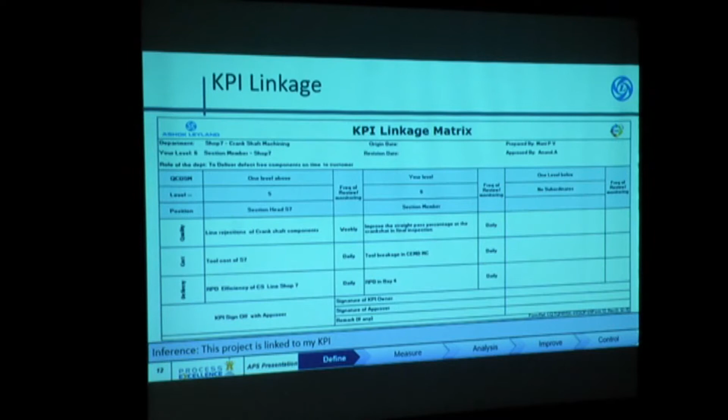So what defects make up the 73% straight pass rate in crankshaft? In Ashok Leyland, everyone's KRA has a KPI, key performance indicator, aligned to top management. We can't set the KPI individually; it should branch from the MD. Every KPI is linked to the management business goal. This is the KPI linkage matrix, showing that we are addressing straight pass improvement in the crankshaft.

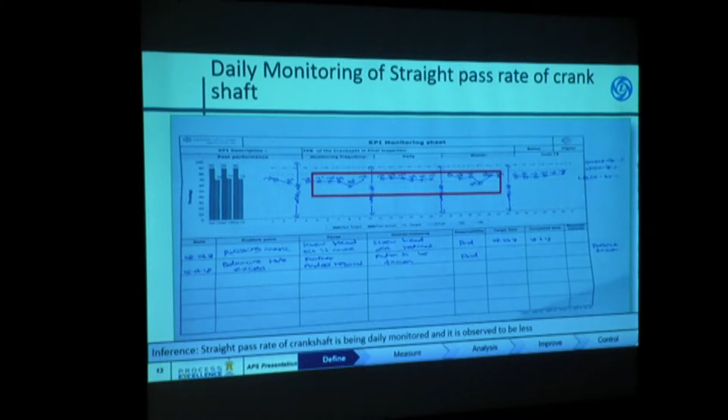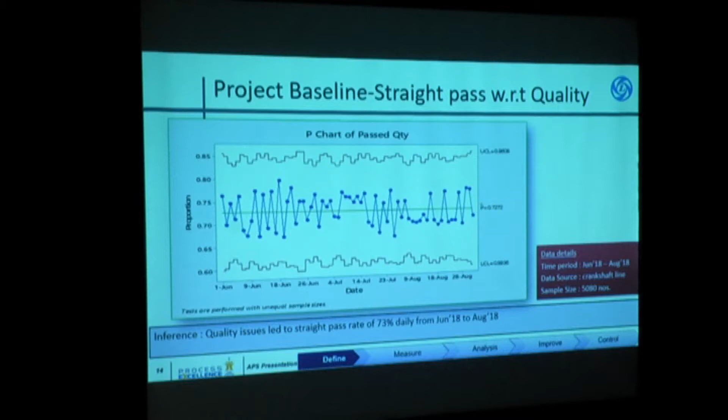This is the KPI monitoring sheet where we monitor our straight pass improvement and the range before the project. This is a P chart. Before the project, we monitored our defects per day and outputs. The P chart shows that the variation is inherent in the process; there are no assignable causes. Based on that, our first pass rate was only 73%.

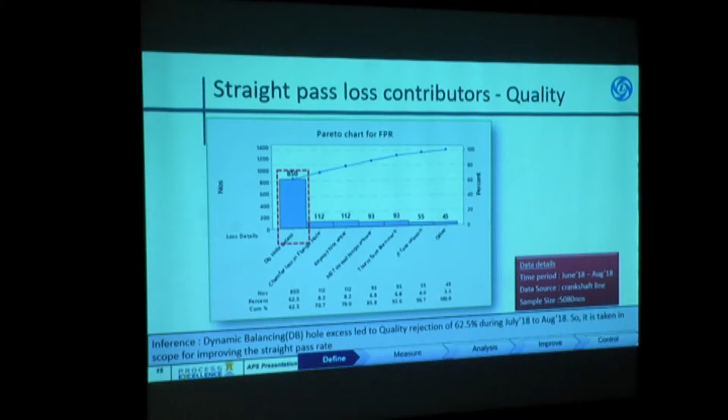This is a Pareto chart. From it, DB hole excess is the major problem affecting our straight pass rate. So first we will see about the crankshaft.

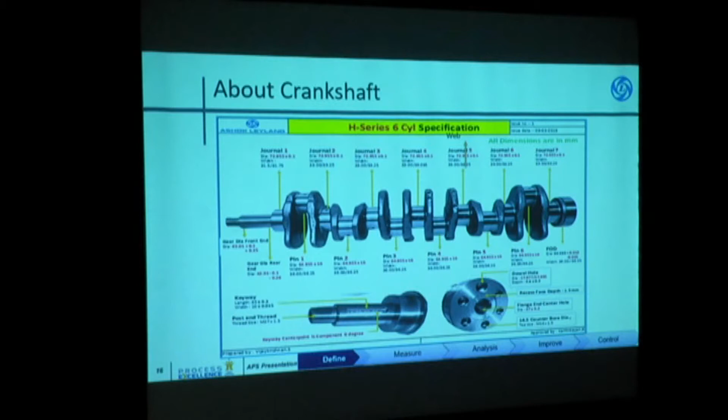Crankshaft specification we have to see: this is for main bearing journals, this is for pin, this is our web. This main bearing journal will mount on the engine. This is a pin for mounting the connecting rod. This is the distance between the main bearing and the pin, that is throw. This angle variation from the dowel hole to the pin is index error. So this is the nomenclature we should know, then only we go to the project.

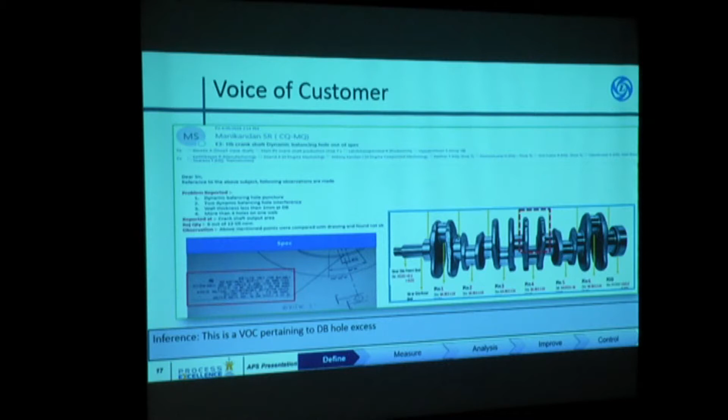So this is our voice of customer. Whatever problem they are facing related to the crankshaft, they will send the mail. We have to take the corrective action. Based on that, we can improve our first pass rate. So this is the first problem: DB hole excess. This is the as-is photo showing that in every web, when we are balancing the crankshaft in the final operation, every web should contain only 4 holes. If it is 5 holes, it will be NC. It will not pass to the assembly.

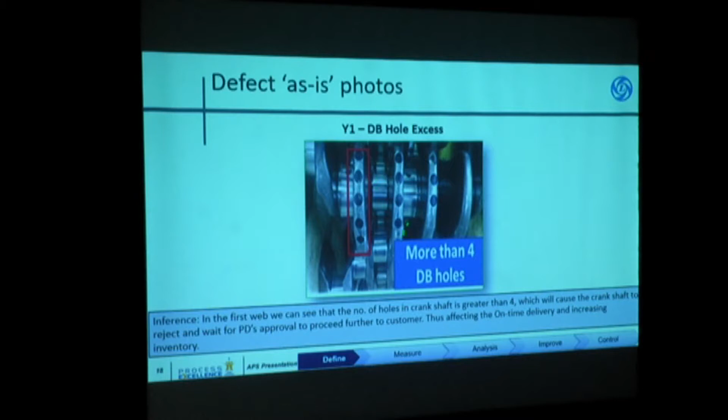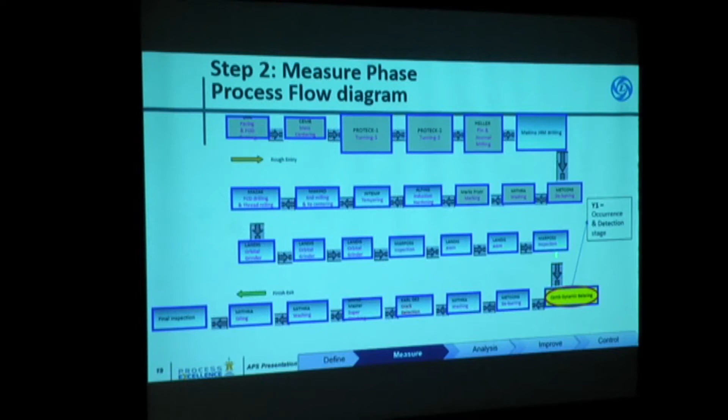So this is our process flow chart. In our process, we are doing the turning operation, then milling operation, then induction hardening operation, and then finally the dynamic balancing operation. This is the process where we make the DB hole, the dynamic balancing hole, in the crankshaft. This will reduce the mass and balance the crankshaft to supply to the assembly. So this is the as-is photo.

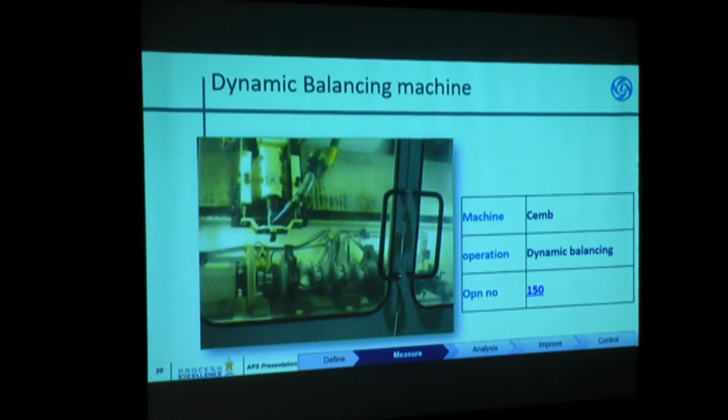First we are going to the in-depth analysis. First, whether the process is operating as per the SOP, we go to the Gemba observation and check the process. In this process, the gantry will load the component and then it will rotate. This is the final grinding operation component. After it rotates, the mass balancing will be checked by the machine, and then the drilling will be done in the web hole. It will remove the mass from the crankshaft, and after balancing it will show that the component is okay, then it will automatically pass. There is no manual intervention, only gantry loading and unloading.

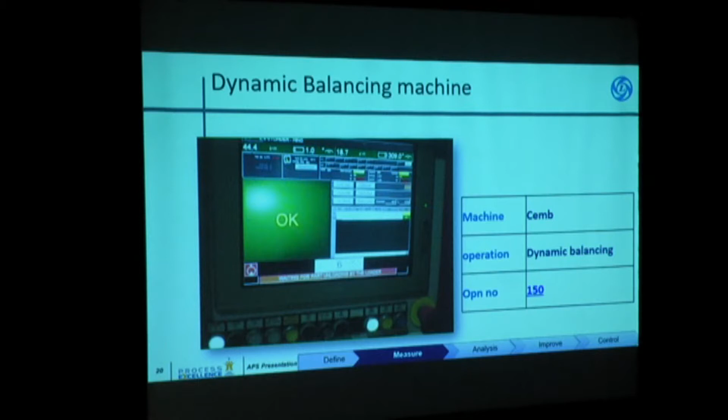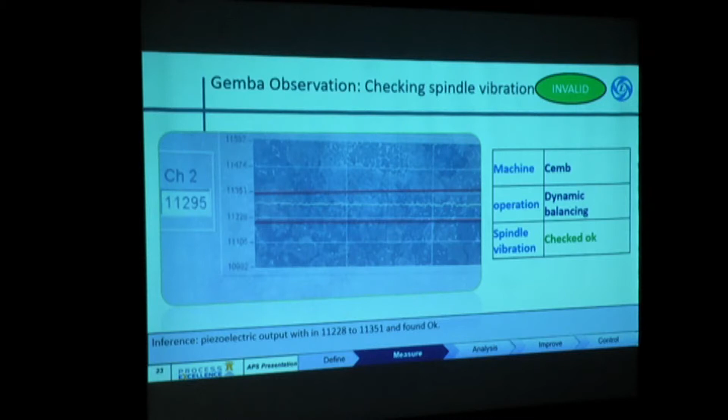So based on that we map the process, whatever key process input variables are associated with this problem, and then the key process output variables. During the Gemba observation, we find out three possible causes of component rejection in the dynamic balancing machine. First one is spindle vibration. We checked the spindle vibration value and found it within the limit only. Second one is driven bracket tightness. Continuously for 10 days we checked the driven bracket tightness. It is also within the limit, 35 Newton meter. So we eliminate this; it is not a cause for component rejection.

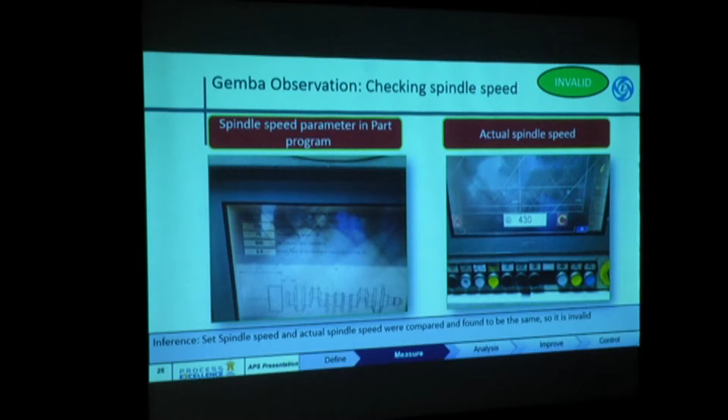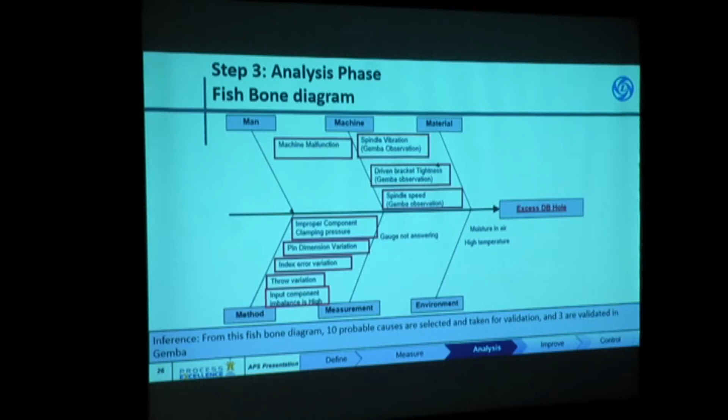The third observation point is spindle speed, set value and actual value. We check the set and actual value for any difference. There is no difference between the set and actual value, so we eliminate the spindle speed also. Then we analyze with the cause and effect diagram. We find out 10 possible causes. Of the 10 possible causes, we already discussed 3 in the Gemba observation. The remaining 7 we are going to discuss.

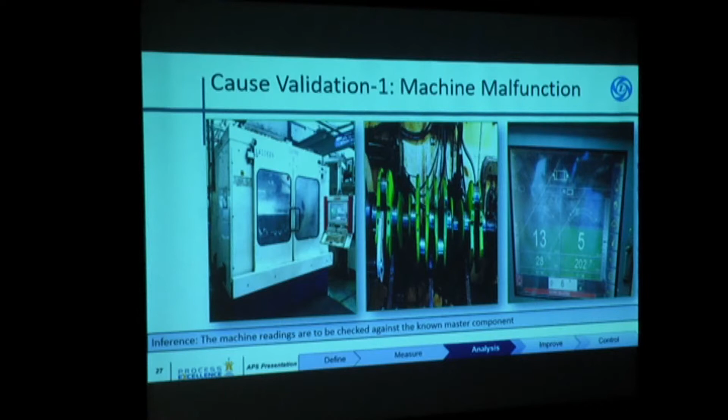First one is machine malfunction. How do we check machine malfunction? Using a master component. This is a master component. Using the master component, we check the imbalance in both plane 1 and plane 2. Plane 1 and plane 2 readings are within spec, and plane 1 and plane 2 angles are within spec. So we eliminate these; they are not causes for the component rejection.

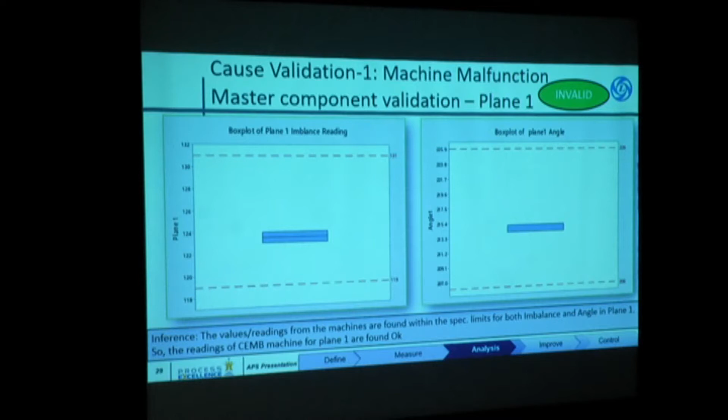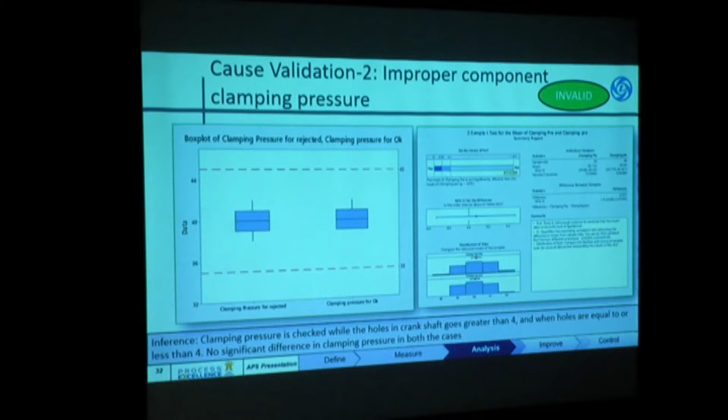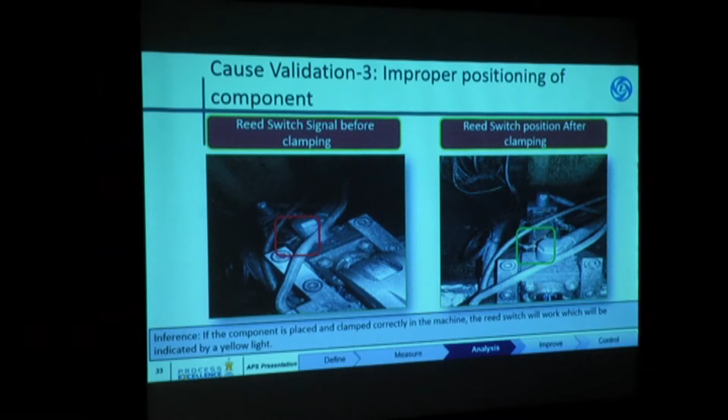Next we go with component clamping pressure. Component clamping pressure is 35 to 45 bar. We continuously checked the sample size and got a p-value of 0.7. So we find out this is not a cause for component rejection. Next we go with component clamping position. For component clamping position we get feedback from the cylinder reed switch. We check the reed switch position with the sample size we have taken. We get a p-value of 0.7. So we find out this is not a cause for the component rejection.

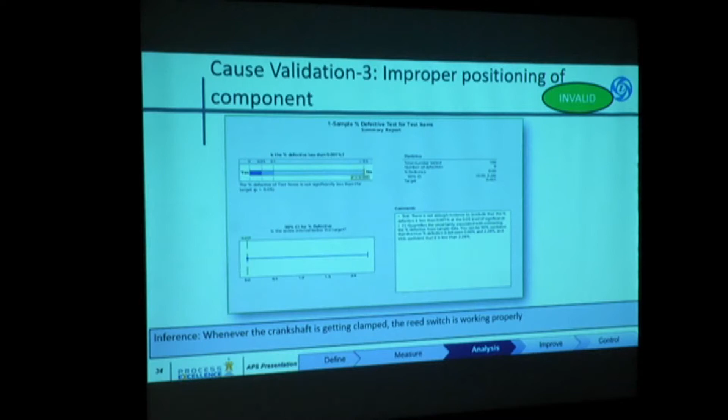In the cause validation we will be verifying whether there is any variation in the pin diameter. Initially we collected 25 data points and tested whether the data follows a normal distribution using the goodness of fit option. We found that the data follows a Weibull distribution rather than normality, since its p value is greater than 0.05.

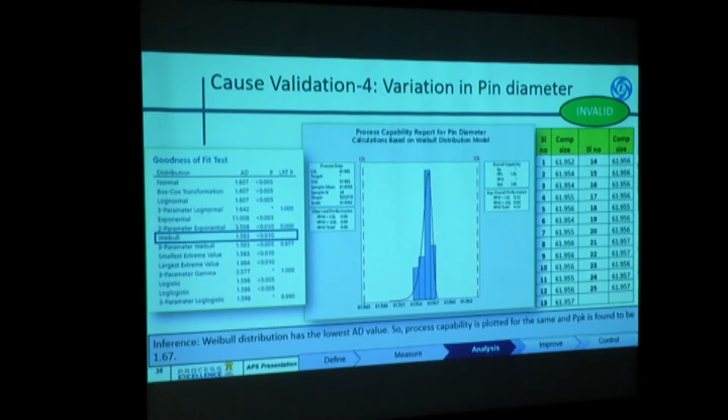So we plotted the process capability for Weibull distribution and found that the Ppk value is 1.67. So the process is capable, meaning there is no variation in the pin diameter. So this is an invalid cause.

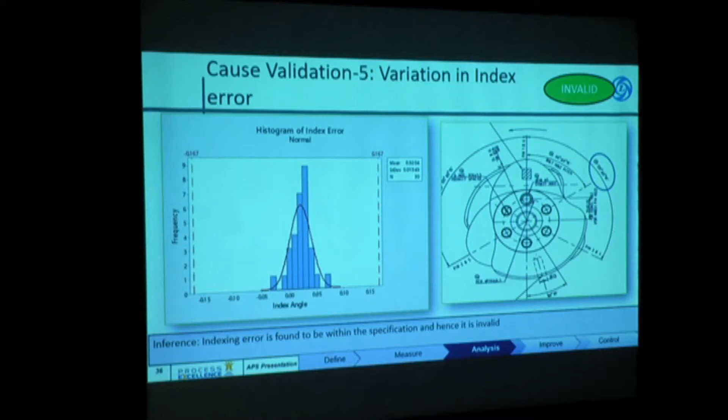Next we go for variation in the index error. The specification is between minus 0.167 and plus 0.167. We collected 30 samples, and the values lie between the specification limits, so there is no variation. Similarly, for throw error, the values lie between the specification limits, and it is an invalid cause.

Next, we collected a very interesting dataset: the imbalance readings for every component machined in the dynamic balancing machines. Plane one is the imbalance readings and the angle at which we get that imbalance. Plane two is also the imbalance readings and the angle at which we are getting that imbalance.

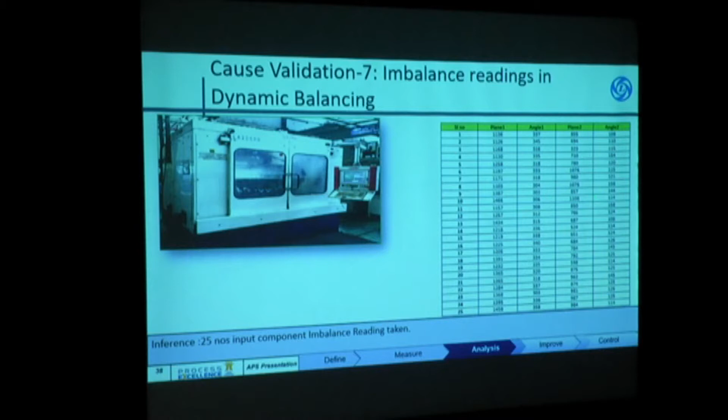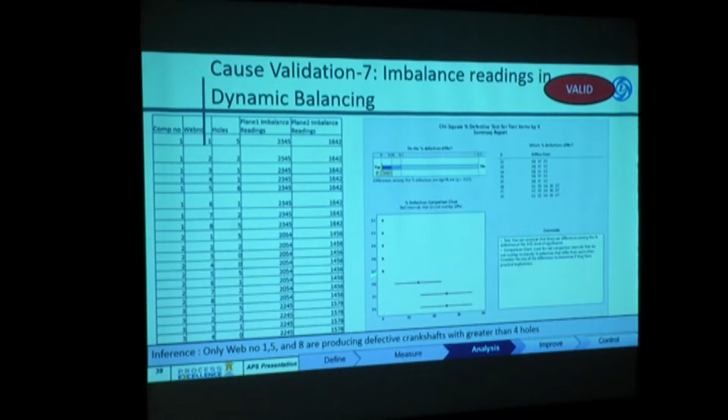We performed a chi-square test to determine at which webs we are getting holes greater than 4. Using this chi-square test, we identified web number 8, web number 1, and web number 5 as the ones getting holes greater than 4. The remaining webs get holes less than 4, so we are not getting any rejection because of those webs. We are getting rejection only in web numbers 1, 8, and 5.

Next, since we collected data where y is a function of x, and x is the imbalance readings which is continuous data, whereas y is the number of holes which is discrete, countable data, we can't go for normal regression. So we go for binary logistic regression instead.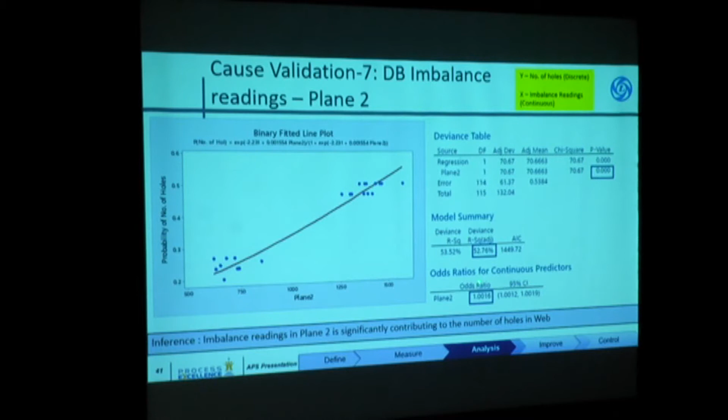Similarly, we plotted data for plane 2, which gives the same p value of 0, with an R square of 52.76. This also shows the odds ratio is greater than 1, indicating a positive relationship between x and y.

We then plotted the data in a scatter plot to find the minimum imbalance reading to set in the crankshaft so the machine does not produce more than 4 holes. We found that 1800 is the minimum imbalance reading in plane 1 to keep holes at or below 4. Likewise for plane 2, we found that if the imbalance is not greater than 1250, the machine will manufacture no more than 4 holes.

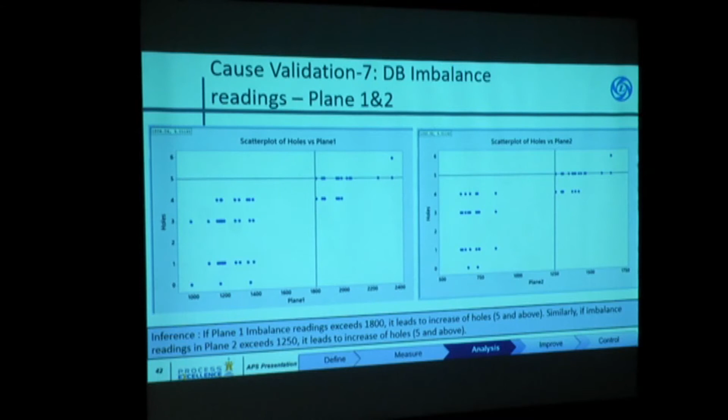So our objective becomes to reduce the imbalance to less than 1800 in plane 1, and to 1250 grams per centimeter in plane 2. These are the cause validations, and the imbalance reading is a valid cause. Based on our observation and analysis, input component imbalance reading is a major factor for excess number of holes.

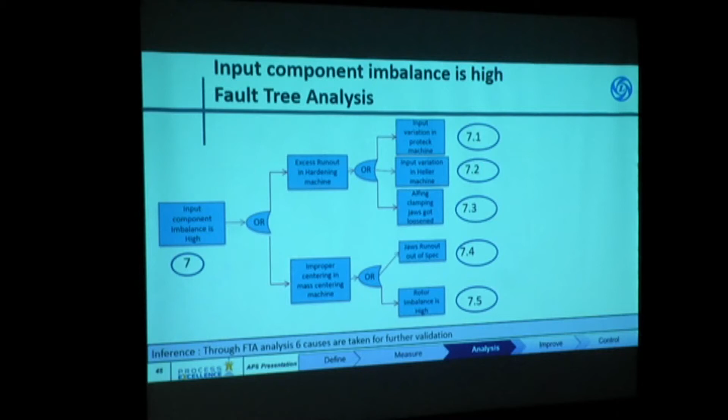Based on that fault tree analysis, we are going to evaluate the causes to identify and eliminate this input component imbalance. First, we are doing the input component Proteck turning operation. In the turning operation, after mass centering, we are doing that.

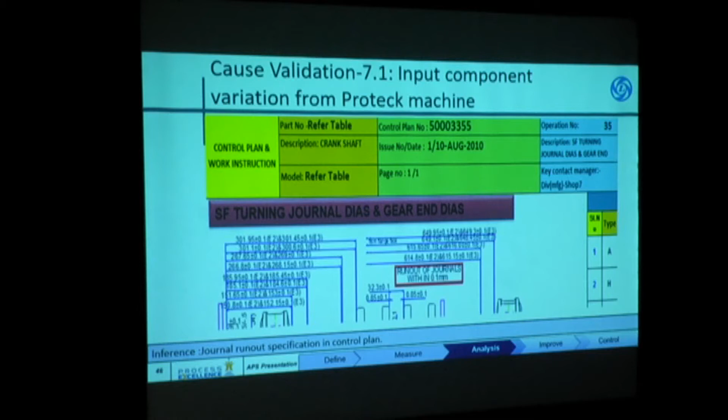We are maintaining one of the critical parameters at 0.1, the run out of the journal. We suspect that excess run out in the journals and pin will lead to imbalance reading of the output component. So we took readings for that excess run out. We found no major deviation out of spec, everything is within spec, and the distribution is normal, the histogram is normal.

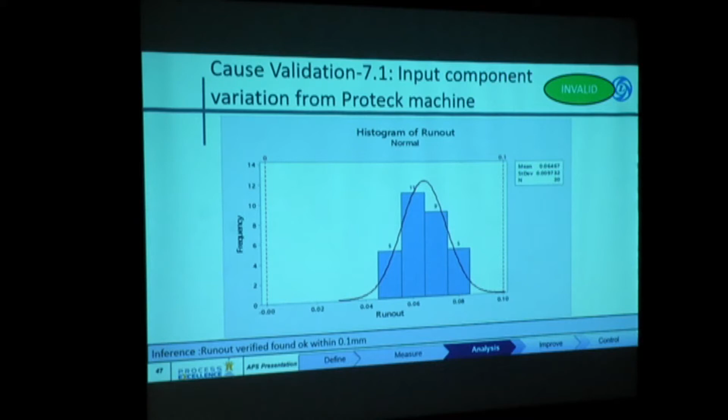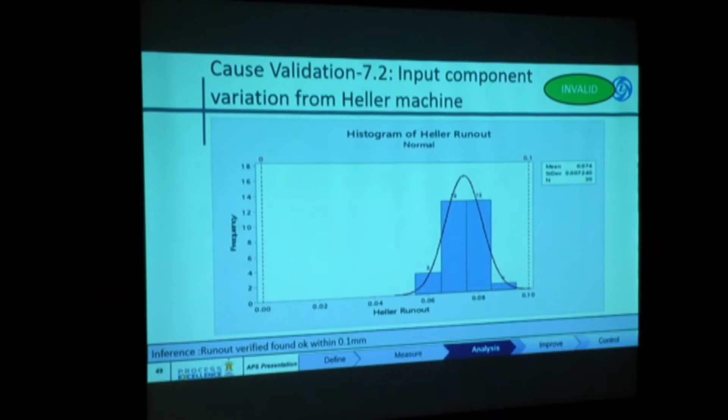Then we go for the pin milling operation. This is one of the Heller pin milling operations. In this operation also we are checking the input component run out. This is also within spec, with no deviation based on the control plan and the tolerance we are fixing.

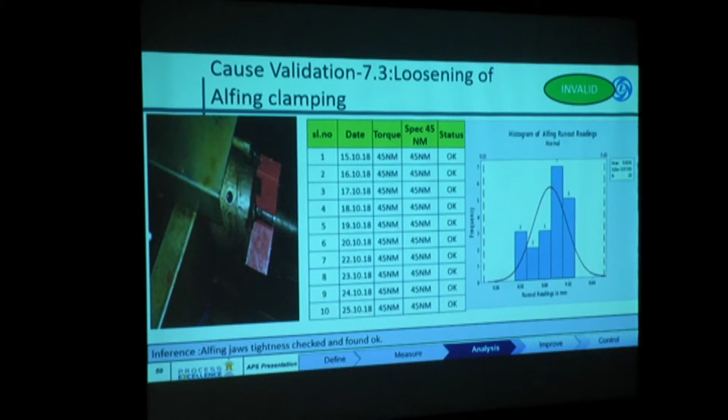Next is the induction hardening operation. This is a heating operation, and the component may bend or create more run out. For that, one critical parameter is chuck clamping pressure. If it is loose in the chuck, we check the tightness in the jaws, ensuring 45 Nm torque is applied to tighten the induction hardening machine jaws. We checked the tightness and found it within spec, with no deviation.

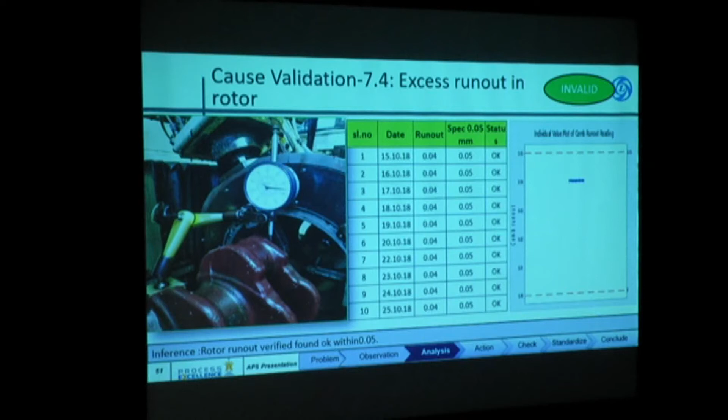Then we come to the front input operation, the mass centering operation. We check this because it is the operation for the input rough component. We check the balance and then put the center; based on the center, we remove material in subsequent operations. In these operations, we check the run out of the clamping component, which should be within 0.05. We checked the run out and it is within the limit.

Next is the rotor. This rotor clamps the component, then the component rotates and the imbalance reading is checked. We check the rotor balance reading in that machine, as this is one of the checking methodologies for machine condition. The rotor balancing should be within 150, but it exceeds the limit. This is one of the major causes.

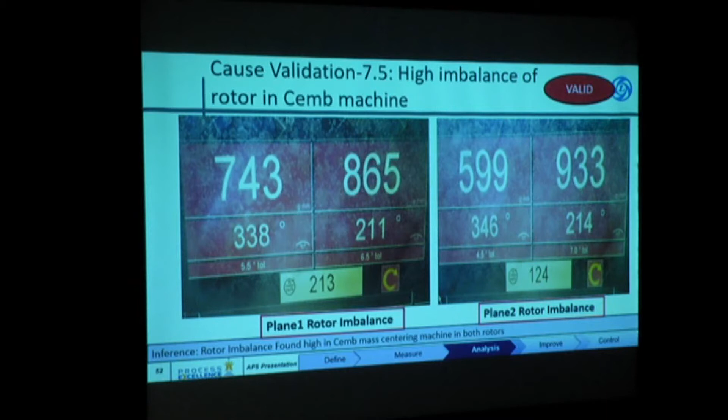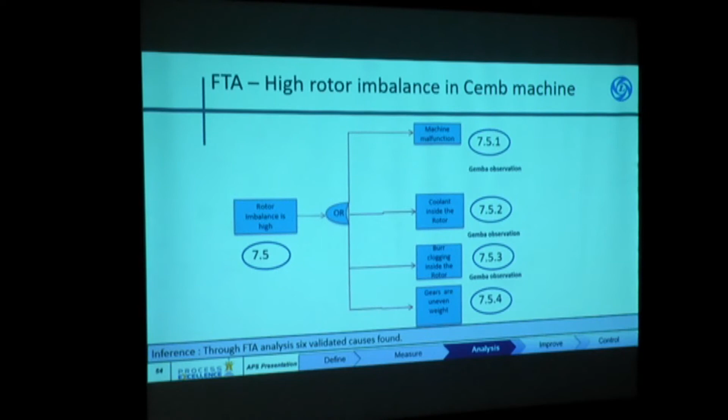Now we have identified this imbalance reading excess as one of the causes for the high imbalance. So why is the rotor imbalance high? We are suspecting several reasons listed in the fault tree analysis.

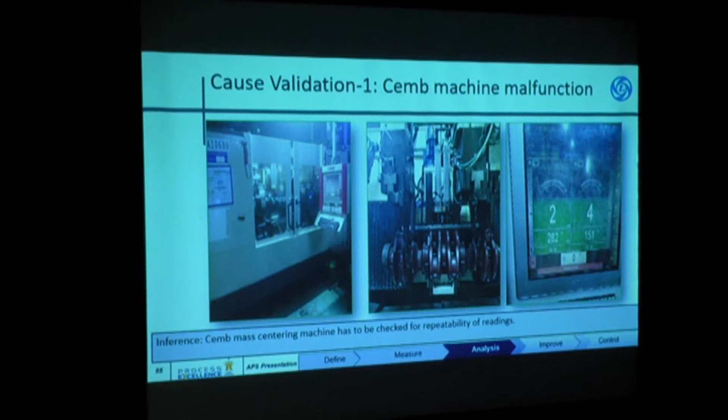First, we check the master. We check the machine, and the master reading is also okay. It's a fine machine, checked on plane 1 and plane 2. The master calibration checking validation was done and found okay.

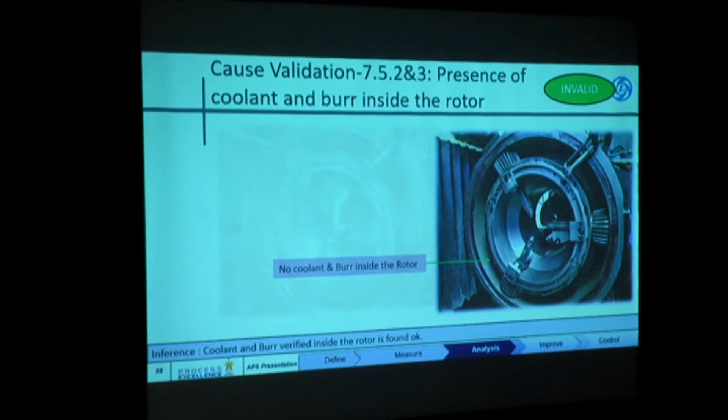Then we check if any coolant or burr is present, since we use the cutting tool with coolant. If any coolant or burr is inside the rotor, the rotor imbalance may be high. So we remove the guard and check the coolant inside the rotor, but there is no coolant or burr found inside.

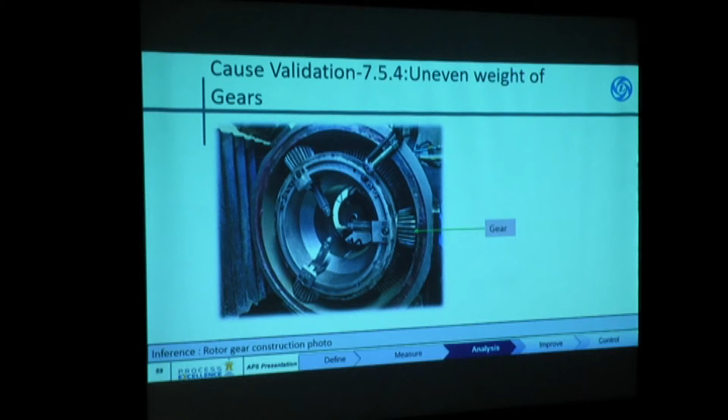We check that there are no foreign materials, and then we check the child parts of the rotor. This is one of the child parts for clamping material, and this is also one of the child parts in the rotor. We check each and every child part of the rotor to see if there is any imbalance, because in the mass centering machine, all rotors should be at zero mass balance for the component to be zero mass balance. So we check the gear, and based on that, we check every gear and find some difference in the gear weight.

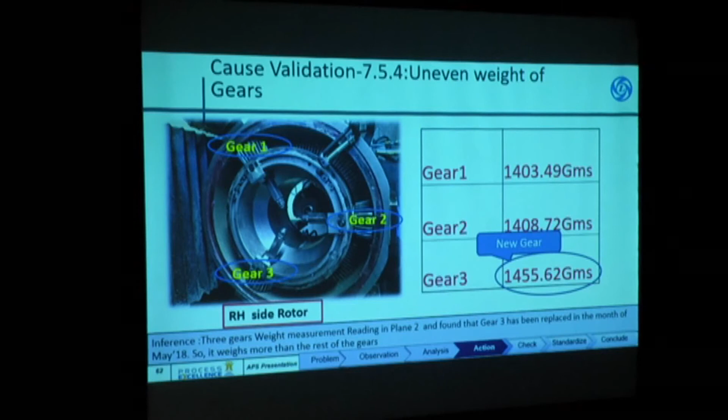So all the gears we are checking, one of the gears is a deviation from the mean value. One gear is 1404 grams, one gear is 1456 grams - two are same, one is different. So based on that, in plane two also we have found that this is one of the root causes, that mass centering causes excess mass.

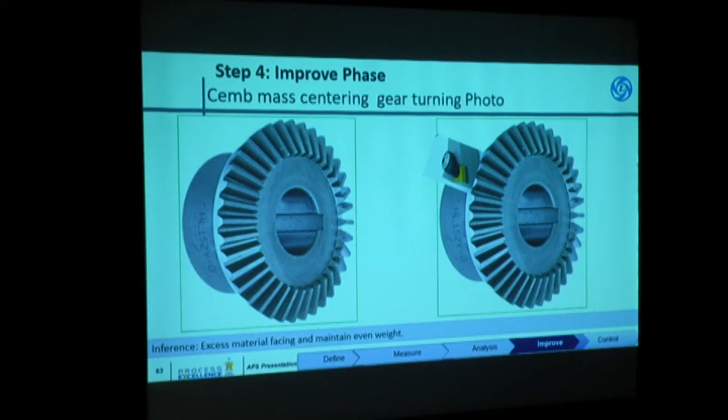Based on that, we will remove the gear and maintain even weight. This is for trial and error. We have removed the gear based on the supplier instruction. We discussed with the supplier, removed the gear, removed some material, and maintained all gears at the same weight, then assembled the gear in the rotor. Based on that, we will calibrate the rotor again.

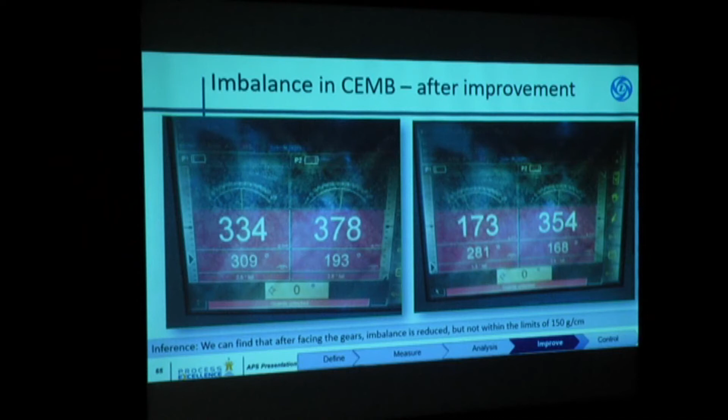But it reduced from 850 to 750, 850 to 300. So with the supplier, we gave instructions on whatever exercise we did in the machine, but then we will get the feedback.

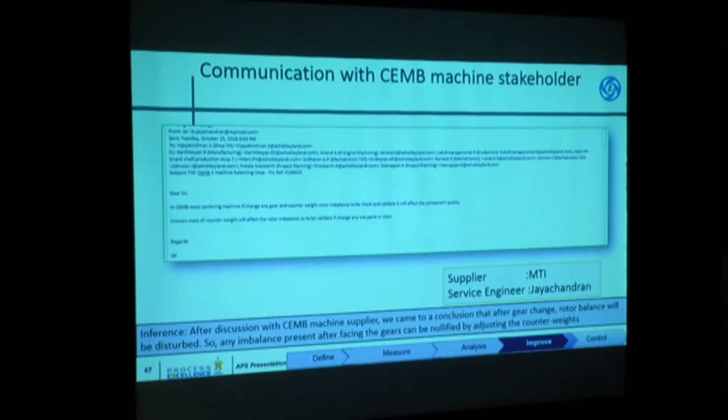But then what? Two minutes more, please. Yes sir, they are giving the guidance.

So you remove and maintain the balance in the rotor, and if you are doing fine tuning, you can add weight in that area. Based on that, you can achieve zero balance in the rotor. So they gave the guidance, and based on that, we did the exercise.

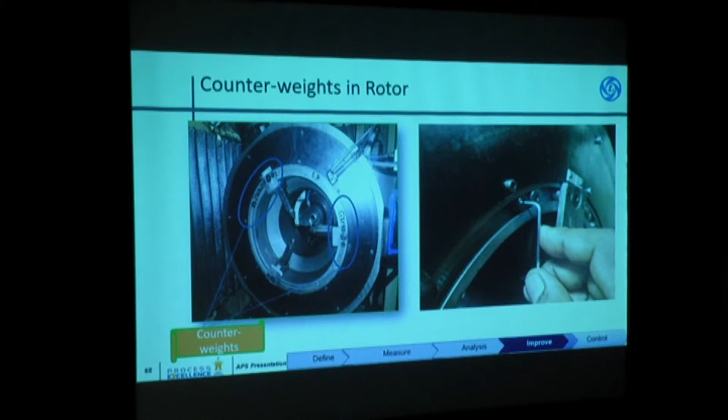But we couldn't do it. We couldn't determine whichever place, whichever degree, we could add the weight. So based on that, we did the DOE analysis. Based on the DOE analysis, we planned to reduce the rotor imbalance.

The reason we went for a general full factorial experiment is that we have two factors - one factor is maintained at 3 levels, while the other factor, angle, is maintained at 4 levels. So we couldn't go for any standard fractional experiment, so we went for full factorial experiment. Since we had 3 by 4, 12 runs and 2 duplicates, we had 24 runs for this experiment.

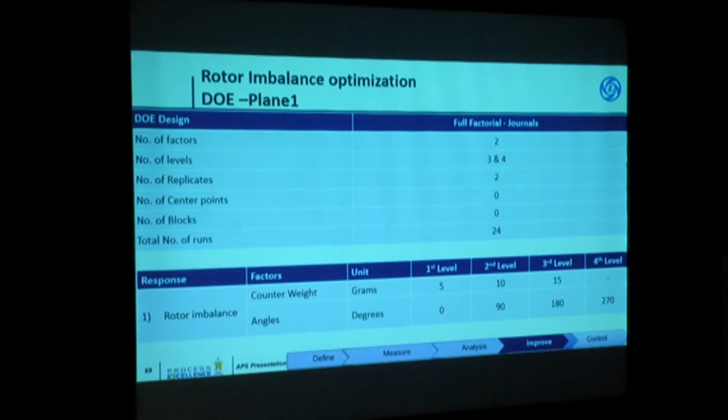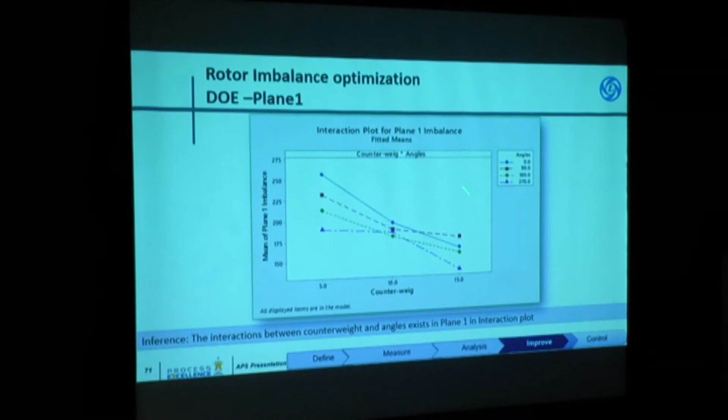In those 24 runs of experiment, we found the counterweight and angles both are significant, while the interaction is also significant, and the R-square value is 99.41, which is maximum here. For the interaction plot, it shows presence of interaction - there are no parallel lines present in this interaction plot.

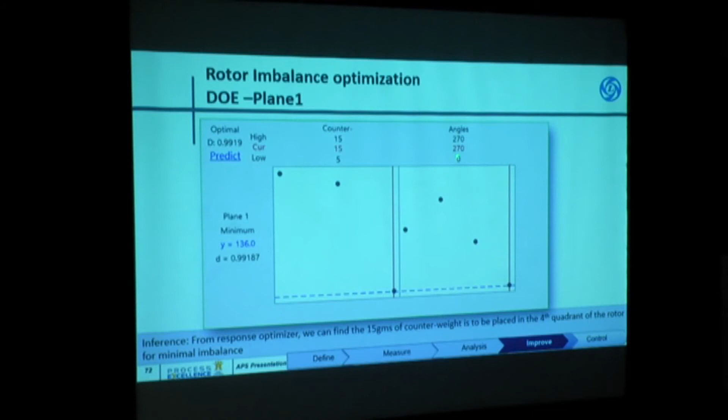So we went for the optimization. The optimization tells us that the counterweight should be placed at 15 grams, and the angle should be placed between 270 to 360 degrees. This is for plane 1. Similarly, for plane 2, the same experiment is conducted.

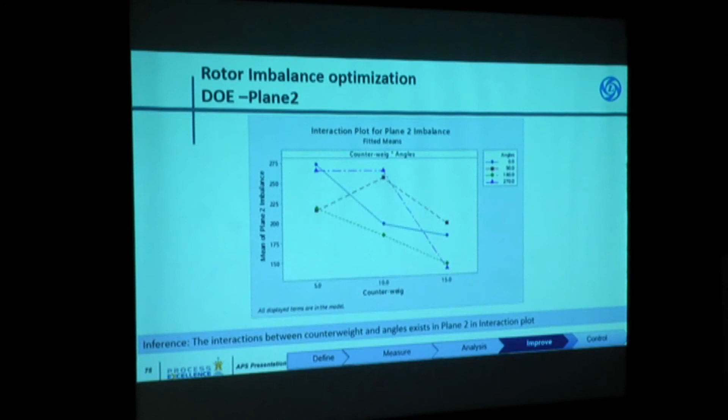We find the counterweight, angles, and interactions to be significant. Here also there are no parallel lines - the interaction exists between the factors. This has also been subjected to optimizer, which tells us the same 15 grams must be placed in the 270 to 360 degree quadrant of the rotor.

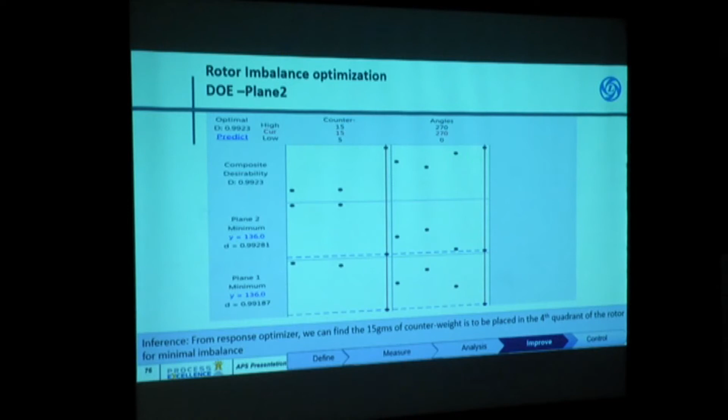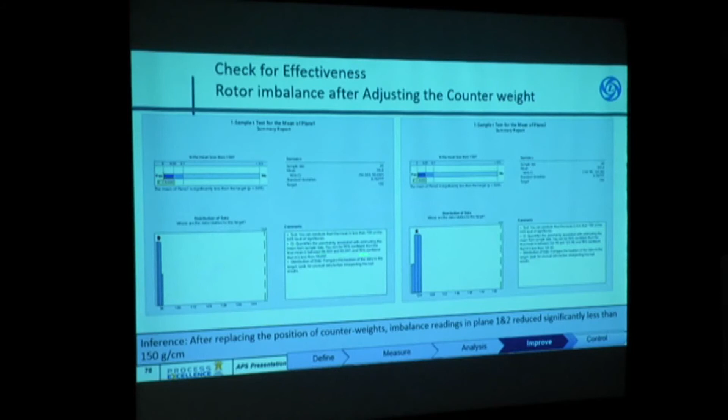After the improvement, we found that the imbalance in the semi-balancing rotor has been significantly reduced to less than 150 grams per centimeter. So this is the one-sample test to check whether it came less than 150 or not. In plane 1 and plane 2, both values are less than 150.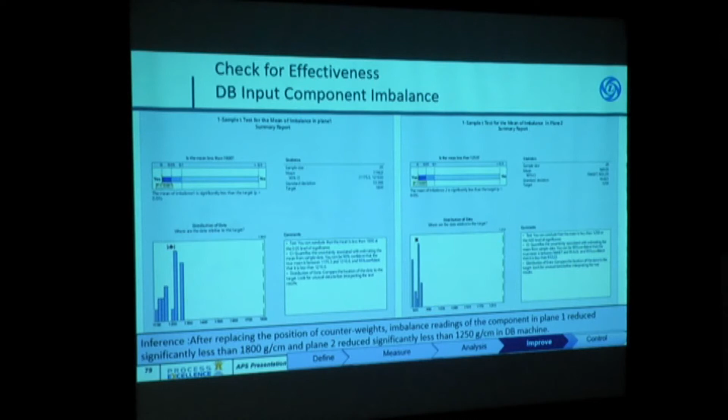Whereas in the DB machine, we checked the imbalance - in plane 1 it is less than 1800, while in plane 2 it is less than 1250. Now we go for the P-chart of this rejection.

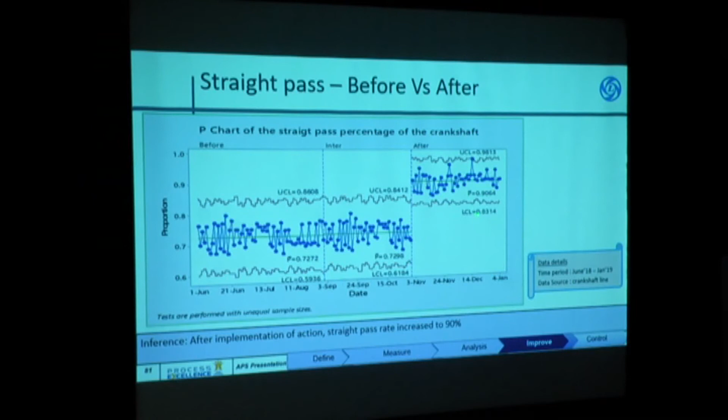Because of dynamic balancing, it reduced from 21% to 0%, and the straight pass improved from 72% to 90.6%. We can see the process is stable.

So based on that, now we are- So your time is over, please. Yes sir, now we have done the improvements.

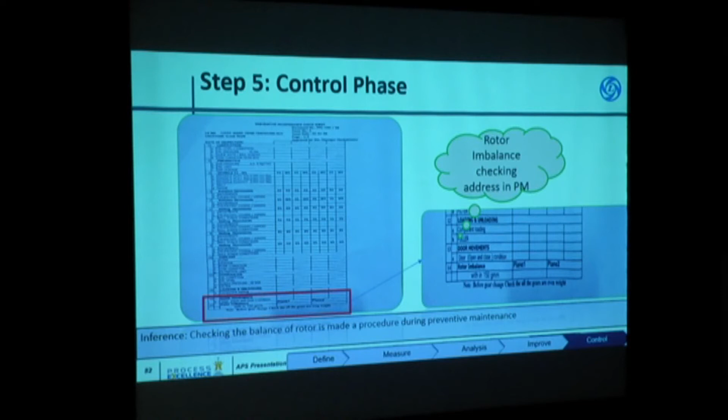Then based on the control phase, we are adding to the PM maintenance checklist. In future, we will check the rotor calibration also while doing the PM, so then only we can avoid future errors. This is the control plan - everything is also updated for future instruction. If any deviations are found, identify the control plan, then they will do corrective action.

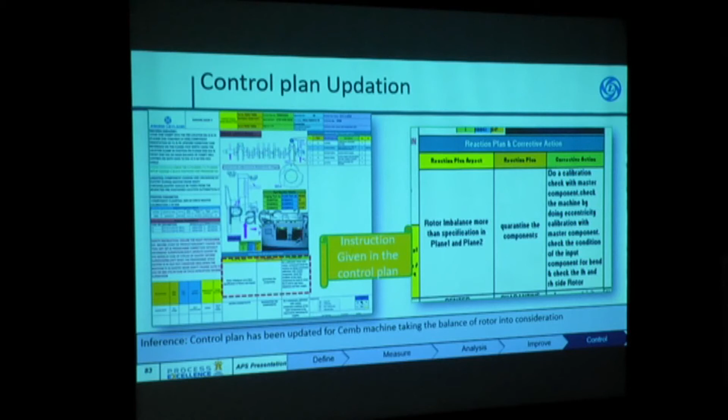Can you go to slide number 31, please?

Yeah, you concluded that pressure is not influencing your result. What is the least count of this pressure gauge? What is the least count of this pressure gauge? See, actually, your maximum range, your fitting range is 35 to 45. So you have to go to a closer least count pressure gauge, or you have to use digital, because you are taking some decision whether it is influencing our result or not, right?

So in such cases, we have to choose the pressure gauge which is nearer to our least count, or we can go for digital, because we are completely eliminating this particular thing based on this only. We don't know exactly what pressure we are getting with this kind of pressure gauge, because you have taken a range of 200 bar, and both are 200 bar range. Agreed, but now you have to go for a lesser least count, because our range is 35 to 45. So that is one thing.